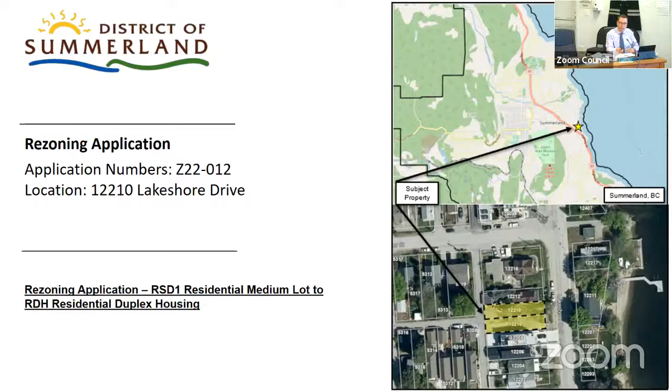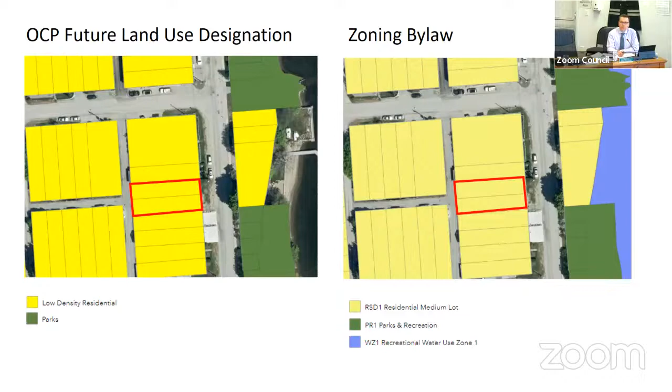Currently the OCP designates these 2 parcels as low density residential, which does allow for duplex housing as part of that designation. The zoning bylaw provides, as I already mentioned, RSD1 for these 2 lots.

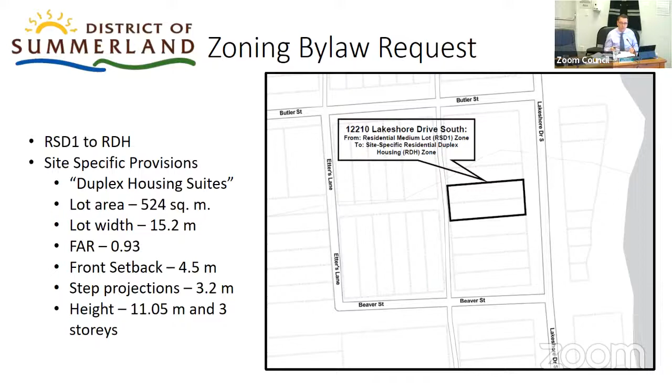The zoning bylaw request includes site-specific provisions to accommodate the proposed duplex to be constructed, which includes the following: reduce the minimum lot area from 850 square meters to 524 square meters; reduce the minimum lot width for duplex housing from 25 meters to 15.2 meters; increase the maximum floor area ratio from 0.5 to 0.93; increase the maximum building height from the lesser of 9.5 meters or 2 stories up to 11.05 meters and 3 stories in height; reduce the minimum front yard setback from 6 meters to 4.5 meters; and finally allow for a duplex housing suite, essentially the same as a secondary suite, to allow each one of the duplex units being proposed to have a basement secondary suite.

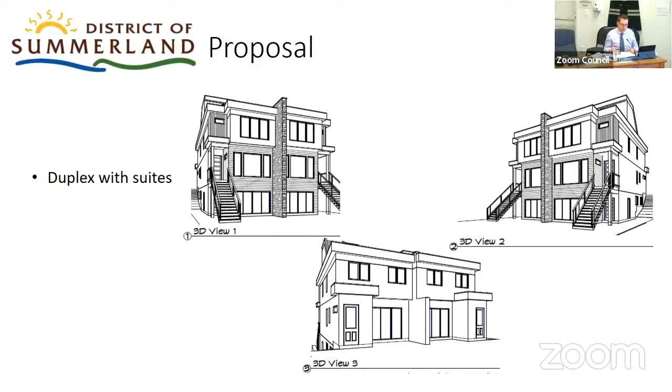So the proposal here shows some conceptual drawings of a proposed 3-story duplex building. The basement floor level is proposed to be the floor level with the suites for each of the half duplexes. So a total of 4 residential dwelling units are proposed to be constructed.

I mentioned the suites on the basement floor level. They're proposed to be 2-bedroom suites with a kitchen and dining area, access to be via the front yard, but as I'll get into, parking is located at the rear of the building.

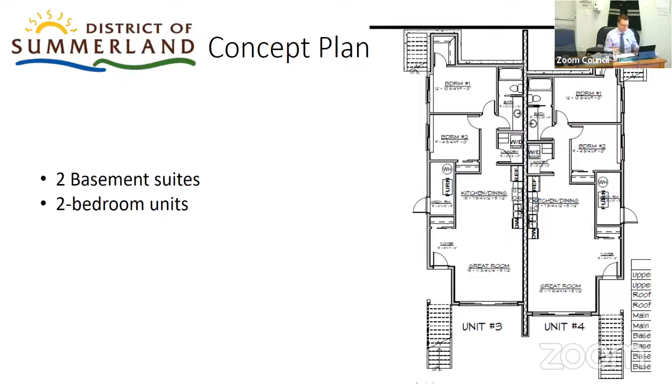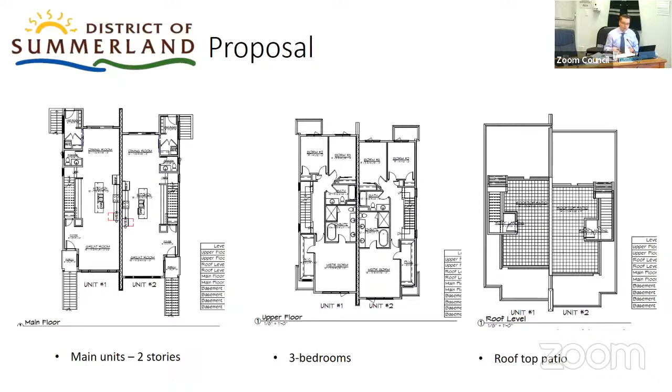The proposed main floor level, as well as the second floor level, and a rooftop patio is shown here for the main duplex building. The 3-bedroom units are located on the second floor with access to a rooftop amenity space for each unit.

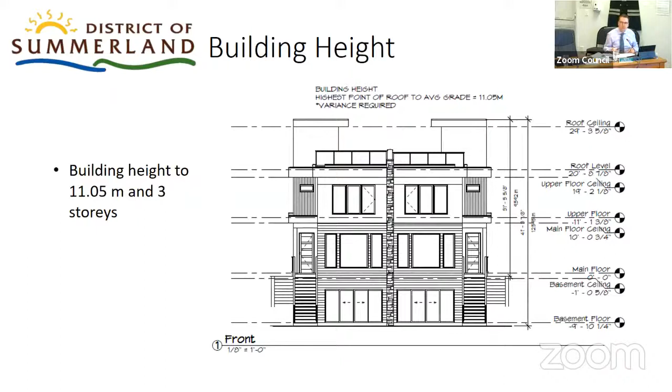So I already mentioned that one of the site-specific provisions of the zoning bylaw amendment is increasing the building height to 3 stories. You can see what this would look like from the streetscape here, and also to increase to 11.05 meters in height. That is to accommodate that vestibule to provide access to the rooftop patio, which you can see at the very top of the building height.

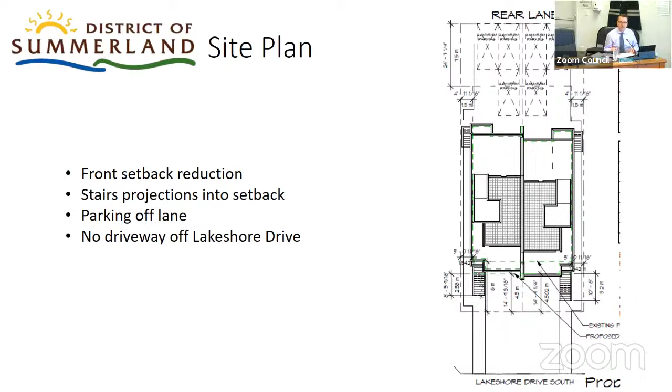So all of the parking for both dwelling units, as well as the secondary suites required, is coming off that rear lane access.

The applicant has also provided some visuals for what the proposed duplex building would look like from the streetscape. The form and character of the proposed 3-story building is very similar to what's being constructed in the Lower Town area, given the small, skinny lot design of the lots that are existing. There's a single-family dwelling, just as an example, on the adjacent parcel, as well as a yellow duplex building to the north that has a very similar form and character as the proposed building.

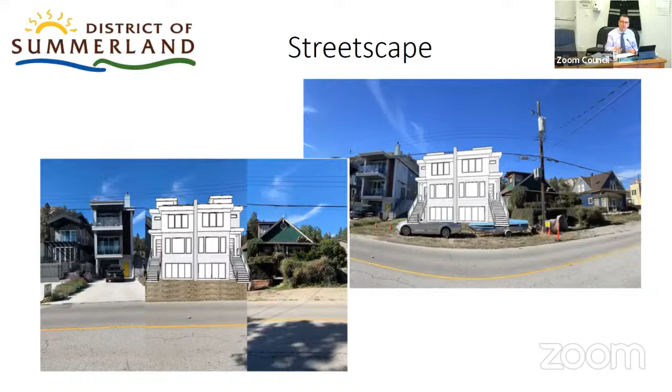So the official community plan encourages a range and diversity of housing options, diversifying away from predominantly single-family housing stock within our existing urban areas, where there is access to community services and infrastructure. In this case, there is access via Lakeshore Drive, as well as the servicing included in the Lower Town area. In addition, the allowance for duplex suites does provide an opportunity for low-cost or affordable housing that can address our affordable housing supply in the community.

The OCP also encourages residential growth in areas that would avoid natural and hazardous areas, as well as wildfire risk, which this subject property does meet.

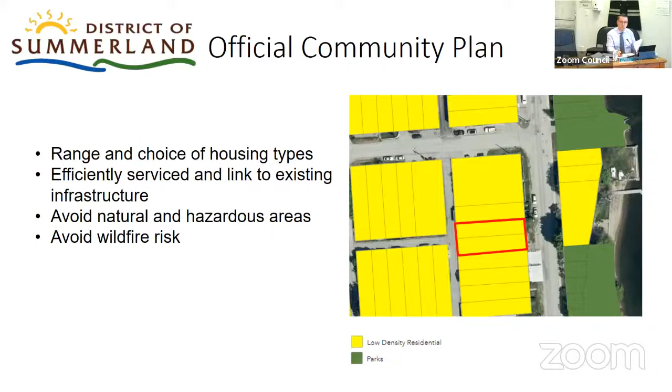In terms of density, the OCP indicates that the preferred maximum density for low density residential areas is 22 units per hectare. The proposed duplex building with the 2 suites included would equate to a total of 38 units per hectare, so it's much larger than that 22 units per hectare amount.

However, staff recognize that the 2 single-family residential lots are historical in their size with the subdivision of Lower Town. As well, currently the applicant has the rights to construct 2 single-family homes as well as a secondary suite in each one of those homes. So the actual density that's permitted with the zoning isn't really changing with this proposal, with a maximum of 4 units.

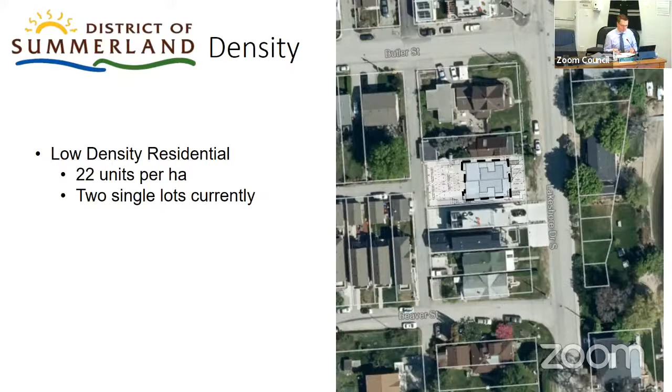Internal comments are provided here. I'm not going to go through them in detail, but I'm happy to take any questions on those.

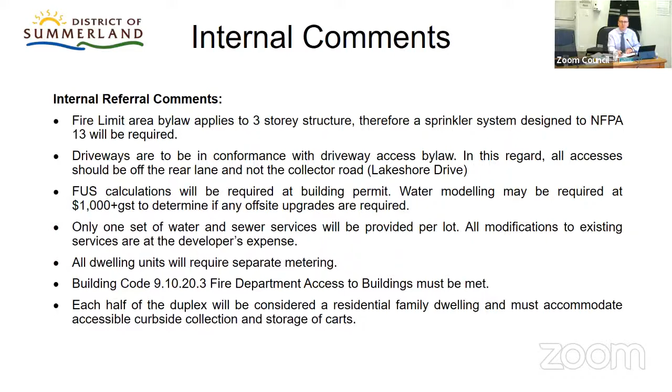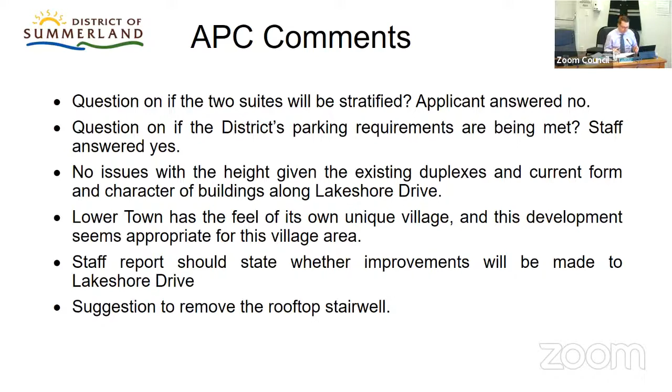APC comments: this application was presented to the September 23rd APC meeting. Most of the comments from the APC were in support of the proposal, given that most felt it was consistent with a similar build form of Lower Town in proximity to Lakeshore Drive. As you drive along Lakeshore Drive, a comment was made that Lower Town is starting to have its own unique village type of feel, and this development seems appropriate for that area. For that reason, the Advisory Planning Commission did recommend support to proceed with the zoning amendment with the site-specific regulations.

In terms of staff's perspective, we feel that this proposal does not introduce any new density to these existing 2 residential lots from what's already existing. As well, we note that the historical size of these lots at 7.5 meters in width would make it very difficult for any new development to occur on these properties without the need for variances, whether that be side yard setbacks in the future for a single family home or even floor area ratio. Given the historical size of these lots, that is something to consider when considering this proposal.

We also are supportive of the applicant making design changes to limit any access off Lakeshore Drive. We see this as a benefit if we can limit the number of access points to Lakeshore Drive. And we also feel that the inclusion of the 2 duplex suites is positive for introducing more affordable housing supply. For that reason, we're recommending approval and happy to take any questions. Thank you.

Thank you, Brad. Questions, Council? Councillor Holmes and then Councillor Patton. Yes, thank you. So how many parking spots will there be in the back?

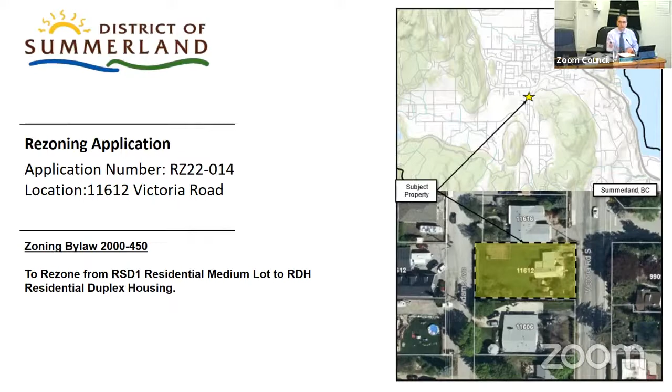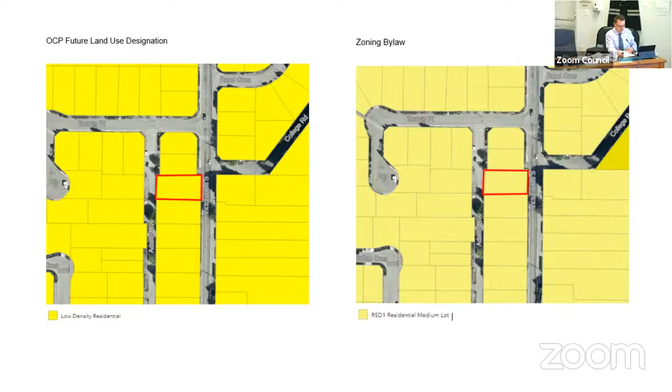So the OCP designates the subject property as low-density residential, again, which does accommodate duplex forms of housing. And the current zoning for the subject property is RSD1, residential medium lot. I already mentioned what's being requested, the RDH zoning, as well as the site-specific provisions.

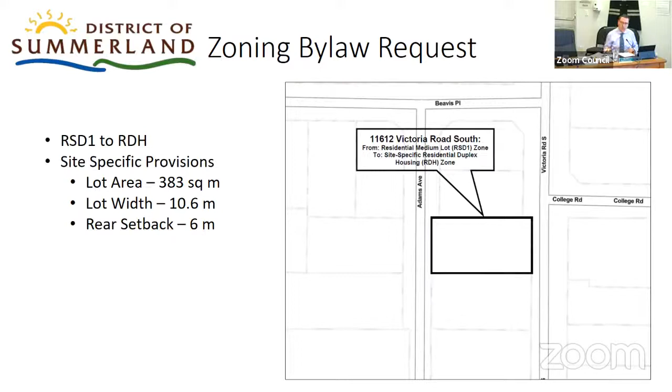Specifically, the site-specific provisions include the reduction of the minimum lot area for duplex housing from 850 square meters to 383 square meters, and also reduce the minimum lot width for duplex housing from 25 meters to 10.6 meters. I should state that those two variances are required also for a subdivision that's been submitted for this property, to subdivide it east-west to create two individual duplex lots. There's also a rear yard setback reduction from 7.5 to 6 meters that's been requested.

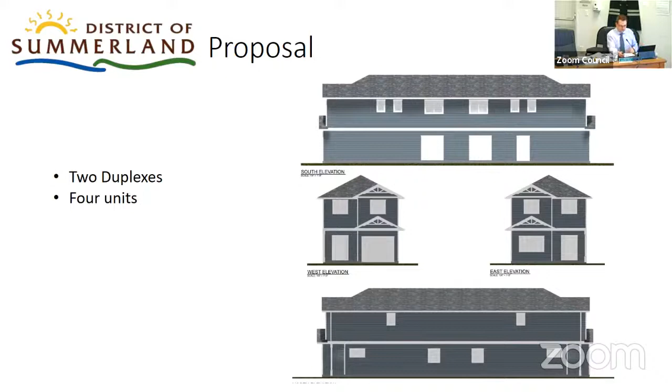As mentioned, there are two duplex buildings being proposed with this proposal, a total of 4 units, with each half of the duplex counting towards the 4-unit total. 2 of the units would be facing Adams Avenue, while the other 2 would be facing Victoria Road.

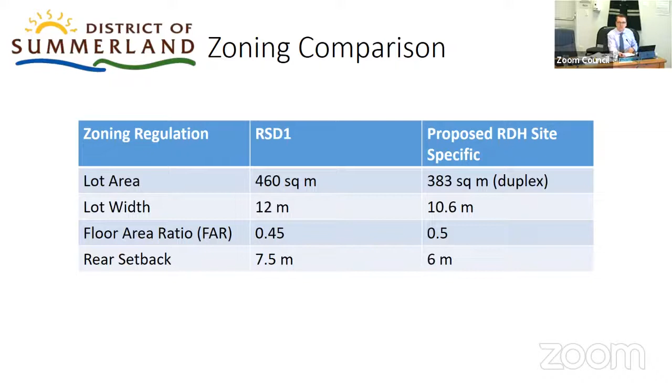Zoning comparison: we've provided here a comparison of the existing RSD1 zone versus the site-specific RDH zone. Again, these reductions for lot area and lot width are required primarily to allow for the duplex building, but also to subdivide the parcel into 2 duplex parcels.

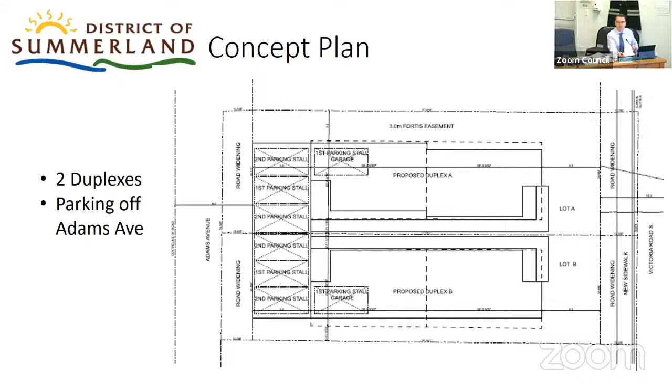The 2 duplex units are front-back, but all of the parking is proposed to be located off of Adams Avenue. Again, this is similar to the previous proposal, where we are trying to restrict the amount of parking coming off of Victoria Road South, as a collector road.

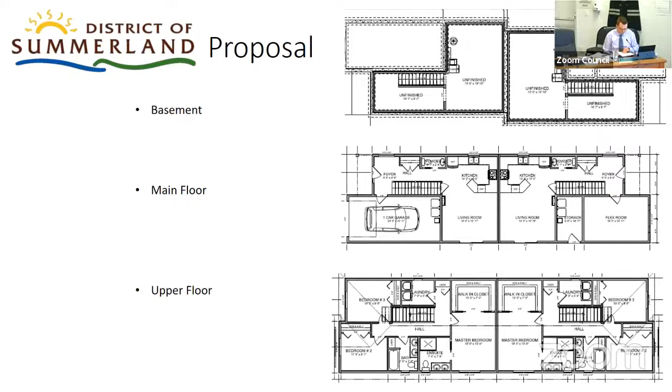I mentioned already the parking being all allocated at the rear of the building, facing Adams Avenue. No driveways are proposed to be accessed from Victoria Road South. This was a redesign, following staff's review, requesting that no access be permitted on Victoria Road.

I want to also mention, on this plan you can actually see it in detail, the district is also requiring, as part of the subdivision, road dedication from both Adams Avenue and Victoria Road South on either side of the property, which is quite significant — I think 4 meters off the property towards Victoria Road, and 3 meters off the property towards Adams Avenue.

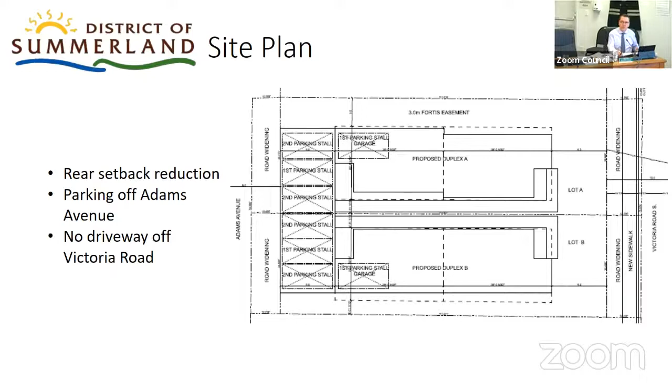Again, access will be limited from the Victoria Road side.

Again, with the Official Community Plan, the district's OCP encourages a range and diversity of housing options, diversifying the district's housing stock away from single family in urban areas with access to community servicing. The OCP also encourages new residential growth in areas that avoid natural and hazardous areas, as well as reduce wildfire risk, and this property meets those criteria.

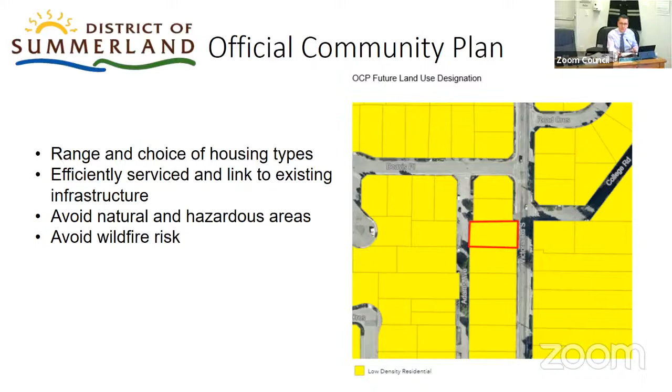Again talking about density, and similar to the previous proposal, the OCP envisions 22 units per hectare for low density residential. With the 4 dwelling units proposed on this 971 square meter property, that works out to 41 units per hectare, almost double what was originally envisioned for the area.

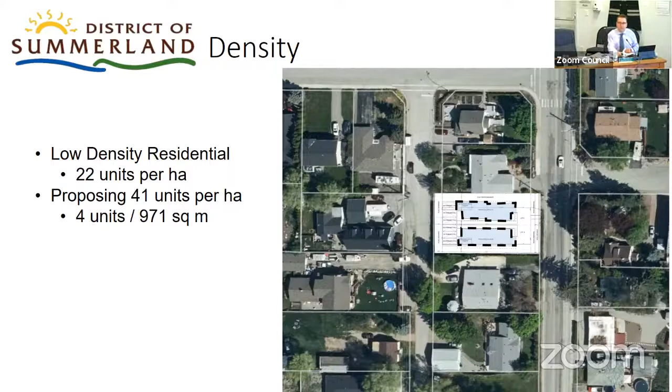In terms of internal comments, there are some comments regarding the road dedication that will be required. I want to mention that because this is a subdivision, and given the amount of units being requested, it is required to make upgrades to Victoria Road with the subdivision proposal.

Victoria Road is proposed to be upgraded with this proposal up to the center line, including curb, gutter, and sidewalk to be constructed, as well as storm infrastructure, which currently is not in place. There is sidewalk located to the north of this property which the new sidewalk would connect into, which is a positive for the proposed development.

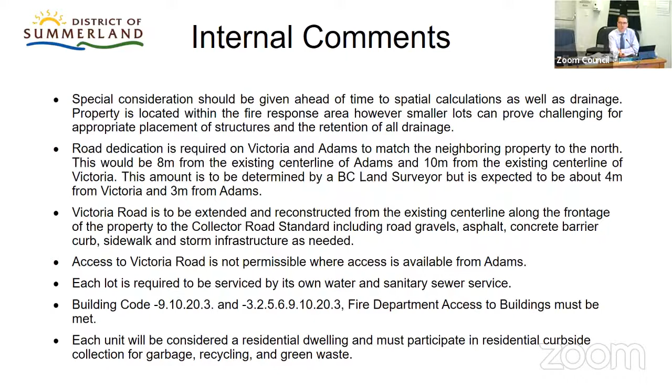This proposal was presented to the Advisory Planning Commission on September 23rd. There weren't a lot of comments from APC regarding this proposal, but most were supportive of new development on this property as an improvement for the area, since it currently has just a very small house. Adding 4 units was seen as a positive, as well as the road widening, sidewalk, and curb and gutter being constructed on Victoria Road South. For that reason, APC was also supportive of the zoning bylaw moving forward for adoption.

Finally, for staff's recommendation: promoting infill development in existing service areas aligns with our growth management objectives of the OCP. Although the density requested is on the high side of what's envisioned in the OCP, the proposed 4 duplex housing units will add to the diversity of the district's housing stock and locate 4 smaller, perhaps more affordable units in close proximity to schools, the downtown, and existing sidewalk infrastructure for walkability. Staff is also supportive of the applicant making design changes to limit access off of Victoria Road, which is a busy collector road.